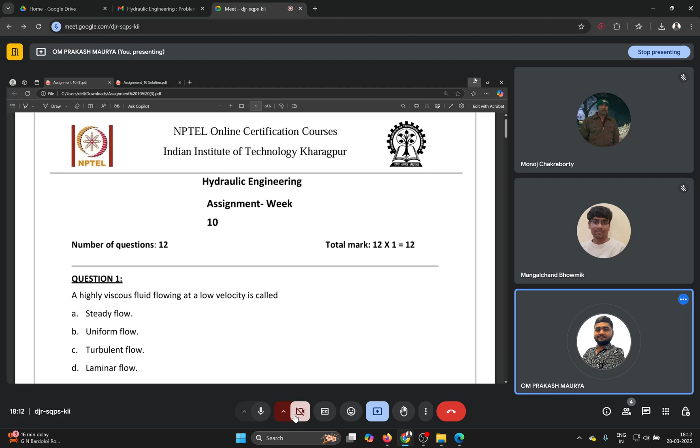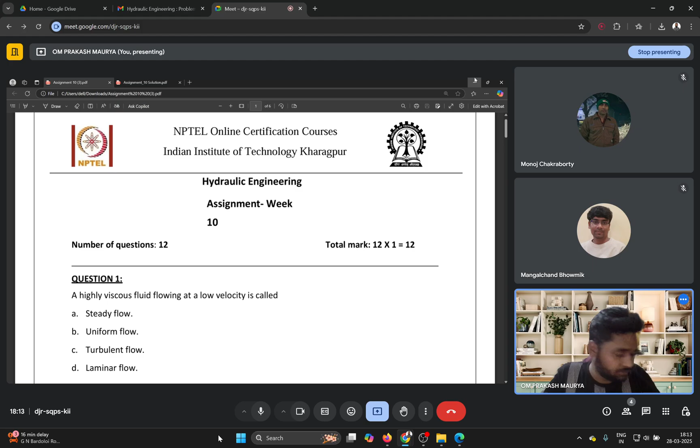Okay, let us start. The first question is: a highly viscous fluid flowing at a low velocity is called steady flow, uniform flow, turbulent flow, or laminar flow. So please try to write your answer in the chat box. Okay, Monoj is telling D option for question number 1, and Mangalchand, you can also write your answer in the chat box.

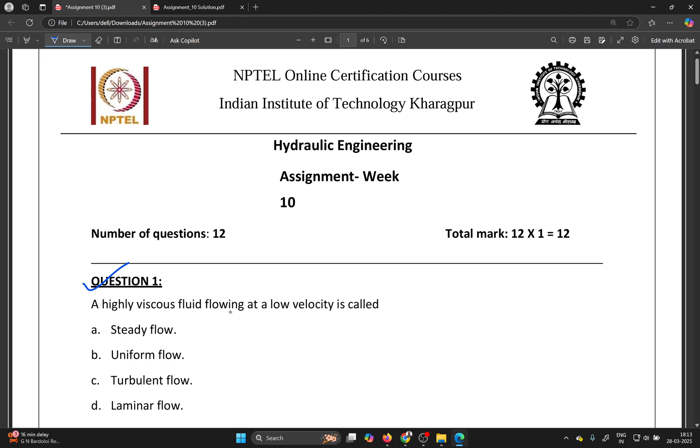Okay, Amit has also joined. So please try to write your answer in the chat box. Question 1: a highly viscous fluid flowing at a low velocity is called a steady flow, uniform flow, turbulent flow, or laminar flow. Which option will be correct? Monoj is telling D. Okay, laminar flow. Amit and Mangalchand, you can also write your answer in the chat box.

Okay, Amit is also telling D. Highly viscous means here the viscosity is more. As you know already, the Reynolds number is rho v d by mu. This is related to your viscosity, right? And if viscosity is more, definitely your Reynolds number will be low. Low Reynolds number means your flow is laminar.

This is a qualitative exam question here, not quantitative, how much Reynolds number, but just for qualitative understanding: if your viscosity is more, then your flow will shift towards laminar. Now we'll move on to the next question.

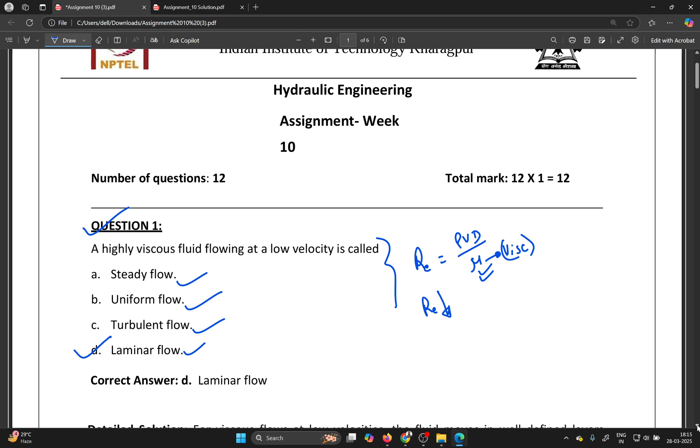Next question: vorticity is thrice the rotation, twice the rotation, 1 to 1.5 times the rotation, or none of the above. Which option will be correct for question number 2? Please try to write your answer in the chat box. Okay, Amit is telling C option, that is 1 to 1.5 times the rotation. Other students, please also try to write your answer for question number 2. Vorticity. Okay, Monoj is telling C, 1 to 1.5.

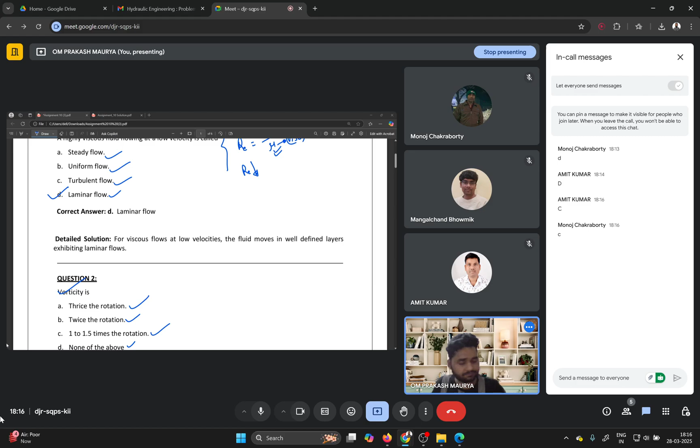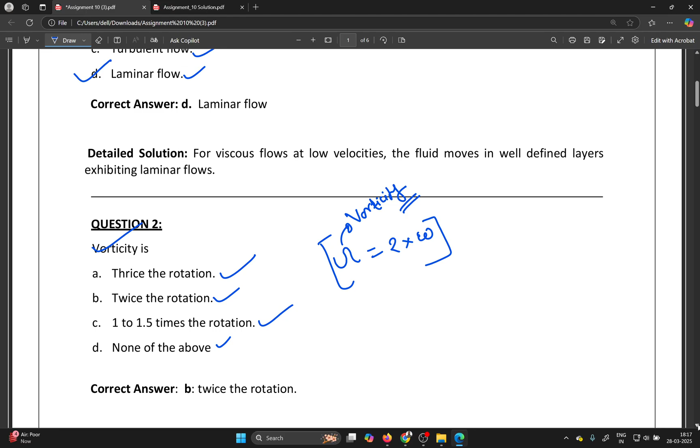So please remember, your vorticity is 2 times the rotation. Always remember your vorticity is 2 times the rotation omega. Always remember this is the vorticity symbol. Here you can see the detailed solution. The vorticity field is the curl of the velocity field and is twice the rotation rate of the fluid particle.

Next question: when a stream function exists, it means the flow is steady and incompressible, the flow is uniform, the flow is turbulent, or the function represents a possible flow field. Which option will be correct for question number 3? Please think on the question, then try to write your answer in the chat box.

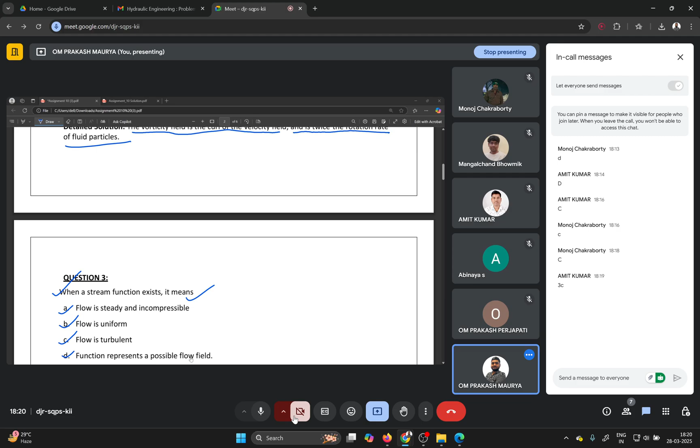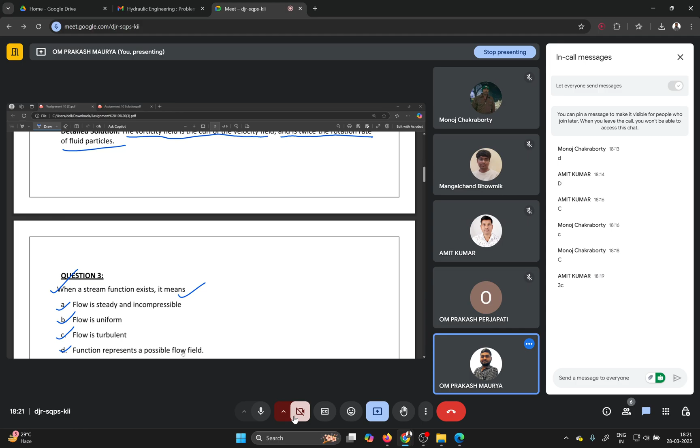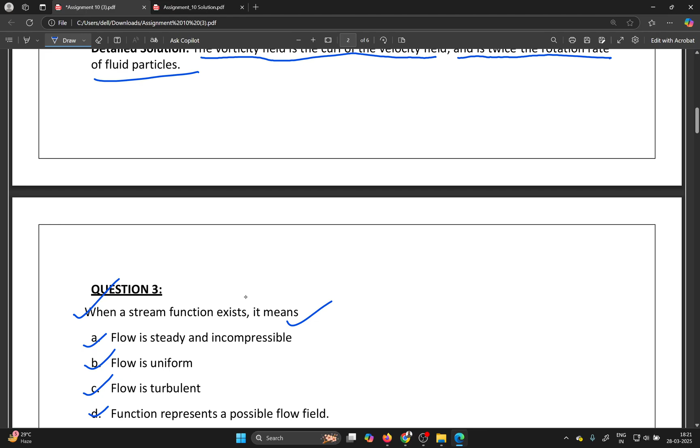Okay, Amit is telling option C, the flow is turbulent. Monoj is also telling C. Okay, other students, please also try to write your answer. So here the question is, stream function exists means the function represents the possible flow field.

Let us assume the stream function exists. If water is flowing like that, what does stream function mean? You know already the two functions, the potential line and the streamline, right? So let us suppose water is flowing and the stream function of that flow exists; it means that mathematical function represents the possible flow field.

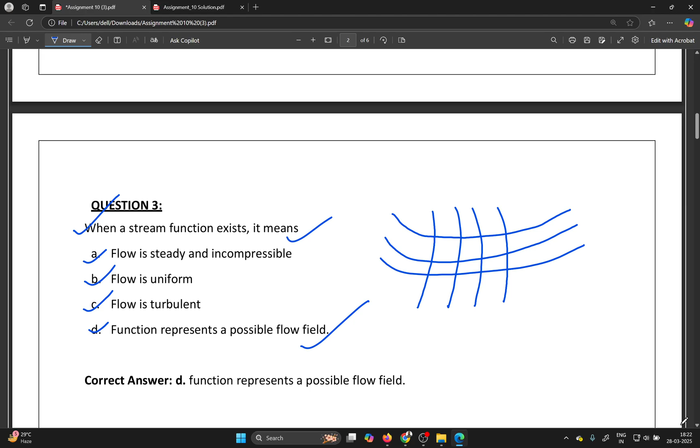So remember, the next point here is also given: if a stream function exists, the flow may be rotational or irrotational, a possible flow field. If it satisfies the Laplace equation, it is a case of irrotational flow. Let us suppose a stream function is given, right? It may be rotational or it may be irrotational. But if that function satisfies the Laplace equation, the flow is irrotational. This is the condition.

Next question. If a stream function exists for a flow and satisfies the Laplace equation, then the flow is rotational and satisfies the continuity equation, irrotational and satisfies the continuity equation, irrotational and does not satisfy the continuity equation, or none of the above. Please think on that. I have just discussed the Laplace equation and stream functions, so based on that, please write your answer in the chat box for question number 4.

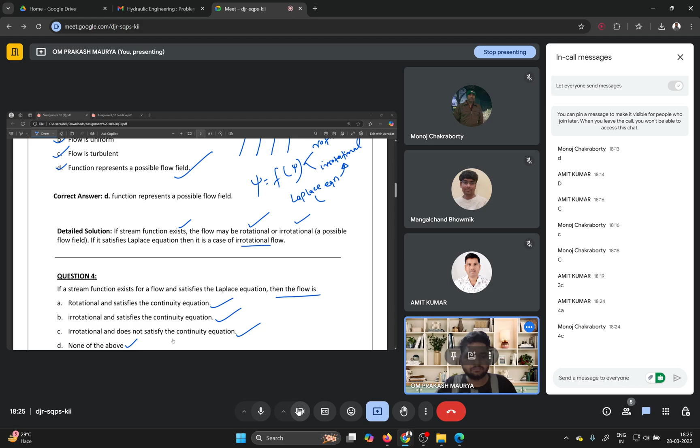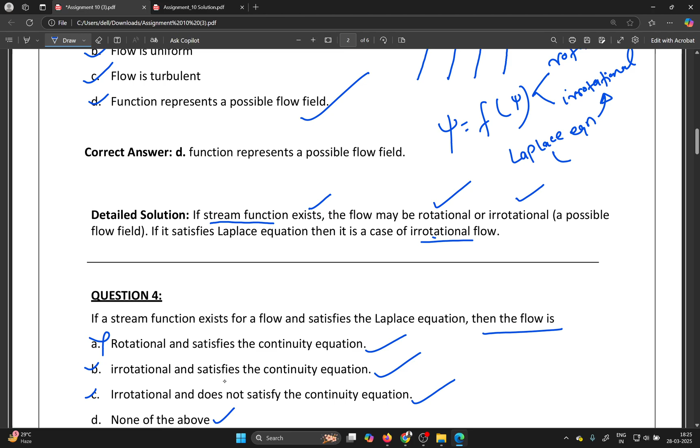So 4A means here, as I have just discussed, if a stream function satisfies the Laplace equation, then it is irrotational. So maybe B or C will be correct. A will not be correct because the question says it satisfies the Laplace equation also. So definitely it should satisfy your continuity equation as well as the irrotational condition. So option B will be correct for question number 4.

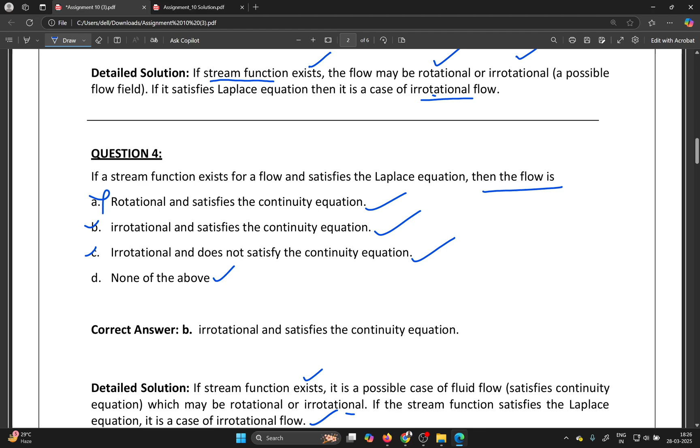Here you can see the detailed solution. If a stream function exists, it is a possible case of fluid flow satisfying the continuity equation, which may be rotational or irrotational. If the stream function satisfies the Laplace equation, it is a case of irrotational flow. Remember please. Next question.

Question number 5. When the velocity potential exists in a flow, it means the flow satisfies the condition of rotational flow, vorticity is non-zero, flow satisfies the condition of irrotational flow, or all of the above. When the velocity potential function exists, remember please, the question here is not about the stream function, it's about the velocity potential function. So please try to write your answer for question number 5.

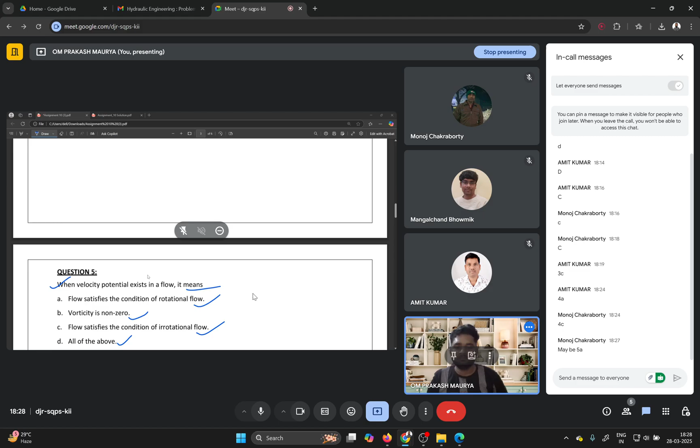Okay, let me just show you the answer. So here, when the velocity potential function exists in the flow, it means the flow satisfies the condition of irrotational flow. Remember please, the flow satisfies the condition of irrotational flow. Remember always. The existence of the velocity potential function guarantees irrotational flow.

But here you can compare two things, the stream function as well as the potential function. If your stream function exists, it may be rotational, it may be irrotational. But if the velocity potential function exists, it guarantees the flow is irrotational only.

But let us suppose you have only the data for calculating the stream function. You can do only the calculation for the stream function. So when you need to determine whether it is rotational or irrotational, what you will do is calculate the Laplacian. You will check whether it satisfies the Laplace equation or not. If it satisfies the Laplace equation, the flow is irrotational.

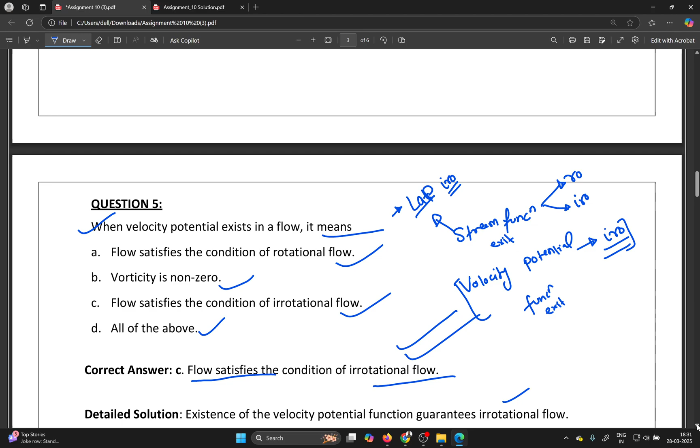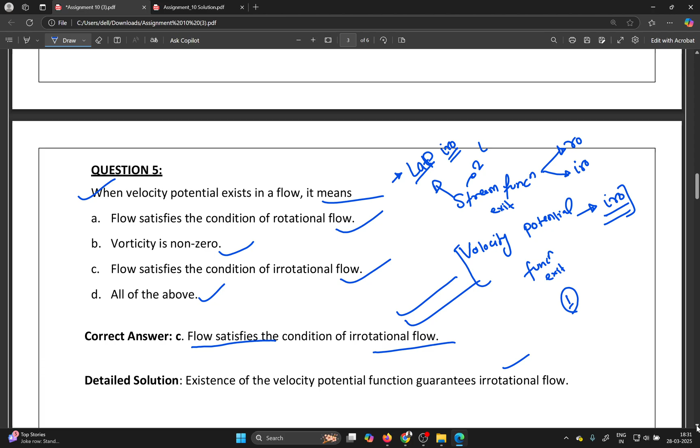So for a stream function, you have a two-step calculation. First, whether the stream function exists or not, and second, the Laplace equation for rotational or irrotational. But for the velocity potential function, you have only a one-step calculation. If it is satisfied, irrotational; not satisfied, rotational. So this is the benefit of your velocity potential function. Now we'll move on to the next question, question number 6.

The deletion of the viscous term from the Navier-Stokes equation leads to: meaning if you delete the viscous term from your Navier-Stokes equation, the remaining equation is known as Bernoulli's, Euler, Torricelli, or Darcy's. Which one? Please try to write your answer in the chat box for question number 6.

Okay, Monoj is telling B. Okay, Monoj is telling B. Okay. Other students, please also try to write your answer. Okay.

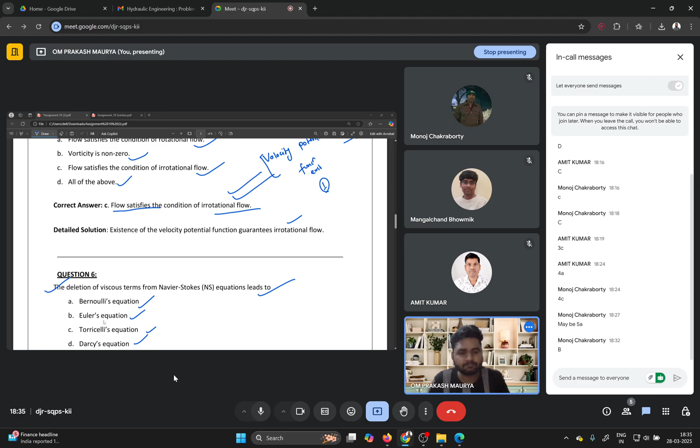So here, let us assume the Navier-Stokes equation. From the Navier-Stokes equation, you are going to delete the viscous term, that is, the force due to viscosity, right? After removing the force due to viscosity, your remaining equation will be Euler. Remember, please, the Euler equation. The remaining equation will be Euler.

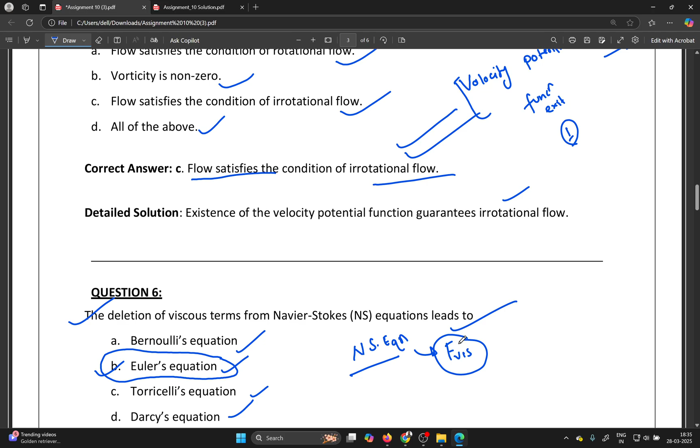Question number 7. In fluid mechanics, the continuity equation is a mathematical statement embodying the principle of conservation of momentum, conservation of mass, conservation of energy, or none of the above. Which option will be correct for question number 7? Please try to write your answer in the chat box for question number 7.

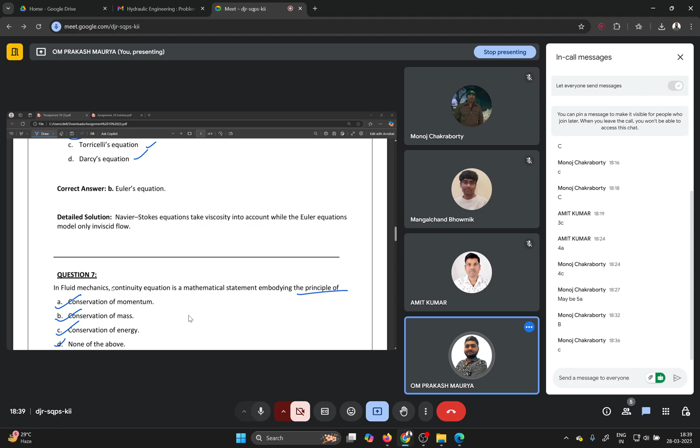Okay. So your continuity equation basically is the conservation of mass. Remember please, continuity equation is conservation of mass, and Bernoulli's concept is based on conservation of energy. Always remember. But let us discuss these two terms, that is your Navier-Stokes equation and Euler equation.

So let me write in the x direction your momentum equation, which is derived by Euler. Momentum in x direction. Let us assume x in this direction and y. We are assuming here 2D. So steady, what is happening? Okay. So here x in 2D. So remember please, we are considering here steady and incompressible flow.

Incompressible flow. So here you have u del u by del x plus v del u by del y is equal to minus 1 by rho del p by del x. This is your Euler. Now Navier-Stokes equation. Let me just write. Then you can interpret it in x direction.

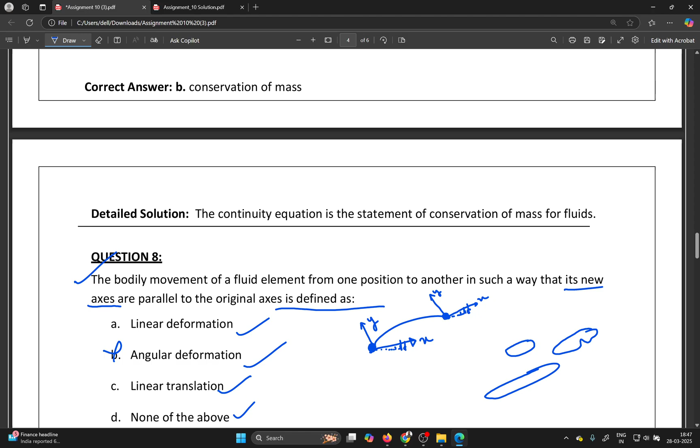So angular deformation will be wrong. Linear deformation or linear translation, these two options remain. So whether you go with deformation or translation. Deformation means your fluid element will be deformed like that. Translation means if the shape is similar here, your fluid particle translates from one position to another position. So now please think again and try to write your answer in the chat box.

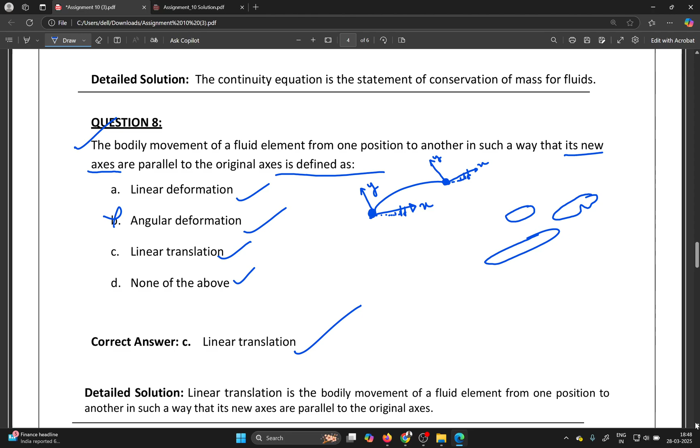Everyone please write your answer in the chat box. Okay, let me just show you the answer. So here it is linear translation. Linear translation, remember please. Linear translation is the bodily movement of a fluid element from one position to another in such a way that its new axes are parallel to the original axes. Remember please.

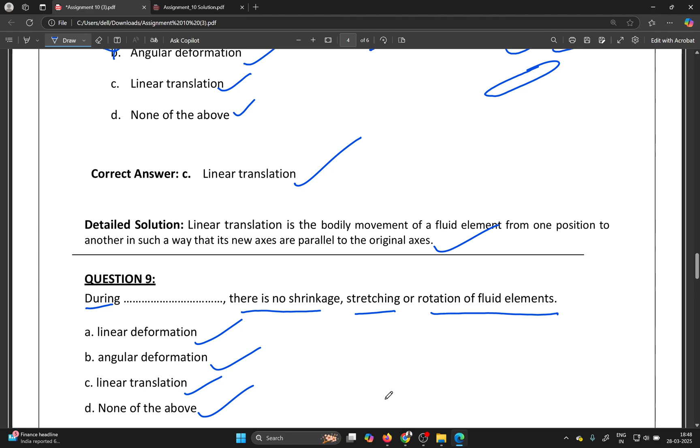Question number 9. During blank, there is no shrinkage, stretching or rotation of the fluid element. Linear deformation, angular deformation, linear translation, none of the above. Which option will be correct? Based on the previous explanation, try to write your answer in the chat box. Everyone, please try to write your answer in the chat box.

Okay, it should be C. Okay, for question number 9 you are telling C. Okay, other students, please also try to write your answer.

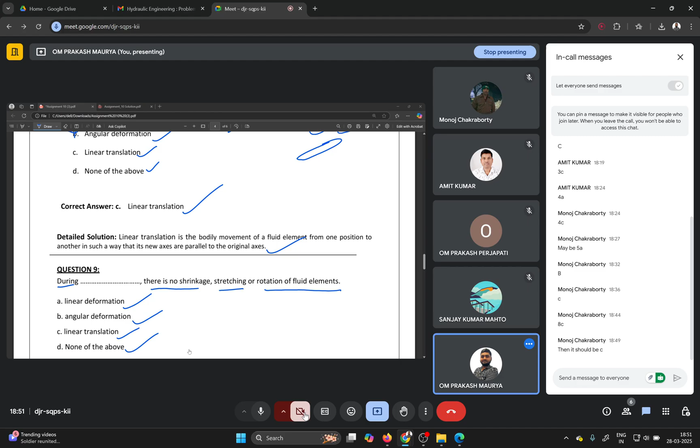Okay, let me just discuss. So yes, definitely option C is correct, linear translation, because, whatever we have discussed, there is no shrinkage, stretching or rotation of the fluid element. So definitely linear translation will be correct. Option C will be correct.

Next question is, what are the independent variables in the Navier-Stokes equation? XYZ rho, XYZ mu, XYZ rho t, XYZ t. Independent variables we are talking about here. Try to write your answer in the chat box, please. Everyone, please try to write your answer.

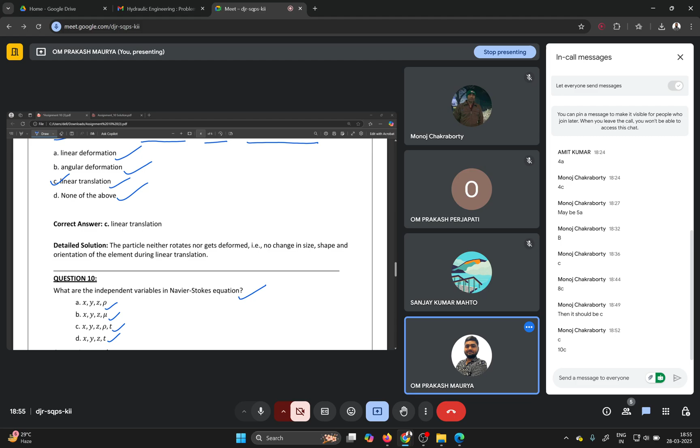Okay, let me just show you. Yes, option D will be correct here. We are talking here about the independent variables x, y, z. Independent means what? Let us suppose variables are of two types, independent and dependent, in a very simplified way. Let us suppose you have y is equal to f of x.

So here you are independent to put the value of x. Maybe you can put 1, maybe 2, maybe 3, whatever you want. Based on the x value, your y is dependent. So here y will be the dependent variable. So the question is asking about the independent only.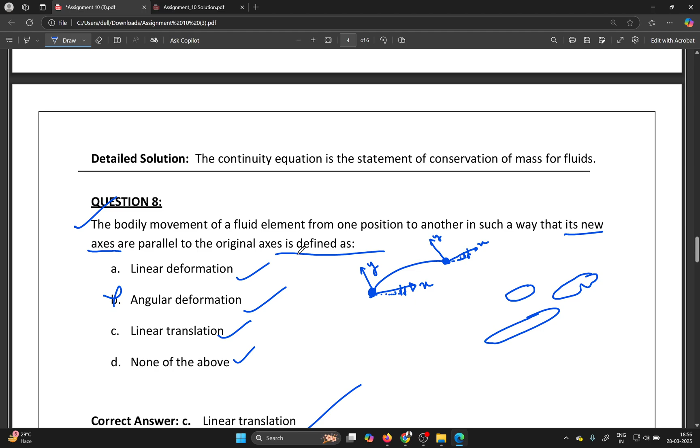So you are free to put x, meaning you are free to identify the fluid properties at any particular location x, y, z in the Navier-Stokes equation, whatever I have discussed earlier. Remember, please. So the independent variables are x, y, z and t.

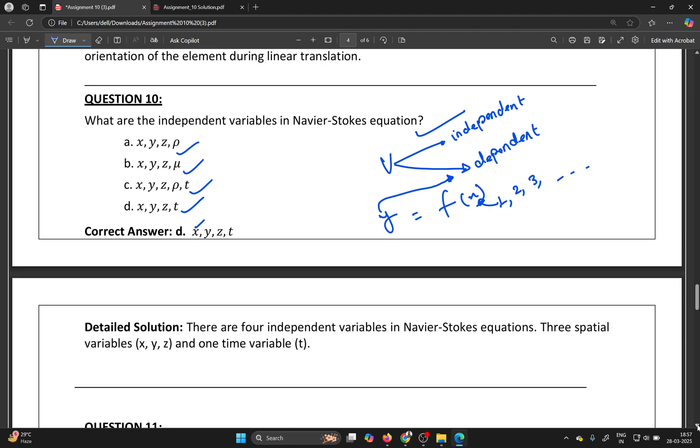Now I'll move on to question number 11. Navier-Stokes equations are a coupled, uncoupled, exponential or radical system of equations. Just please try to think and write your answer in the chat box, whether it is coupled, uncoupled, exponential or radical. For question number 11, please everyone try to write your answer.

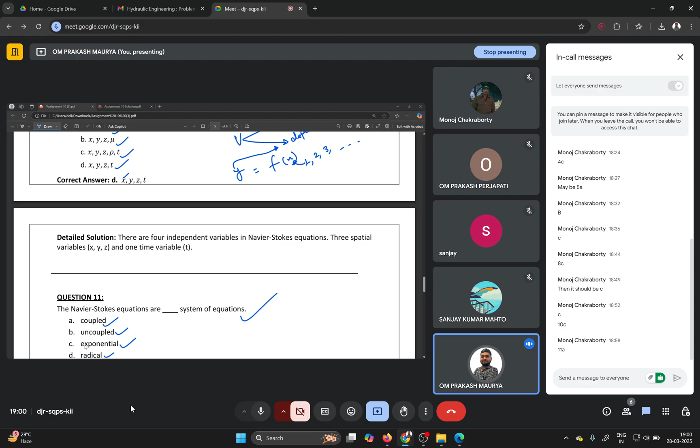Okay. So your Navier-Stokes equation is a coupled system. Remember always, please. The Navier-Stokes equations are called a coupled system of equations because all of the equations should be solved to get the dependent variables.

All of the equations means the x direction, y direction, z direction and continuity equation, and the equations cannot be solved separately to get the unknowns. If you are going to calculate the unknown values, you need the combination of the equations, that means coupled, and the vice versa is uncoupled.

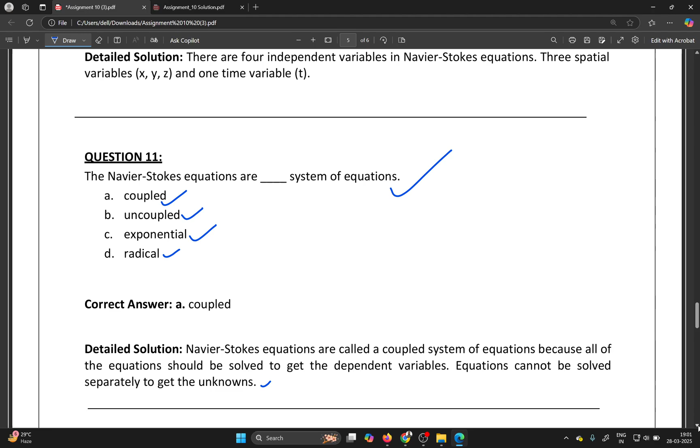So the next question, question number 12, an important question. The Navier-Stokes equations are all partial differential equations. What will be the best reason behind it? Why partial differential? Ordinary differential equations are not present in the Navier-Stokes equation.

The dependent variables are functions of all independent variables. Each dependent variable depends on only one of the independent variables. And partial differentials are only present in the Navier-Stokes equation. So please try to write your answer in the chat box. Everyone, please, for question number 12.

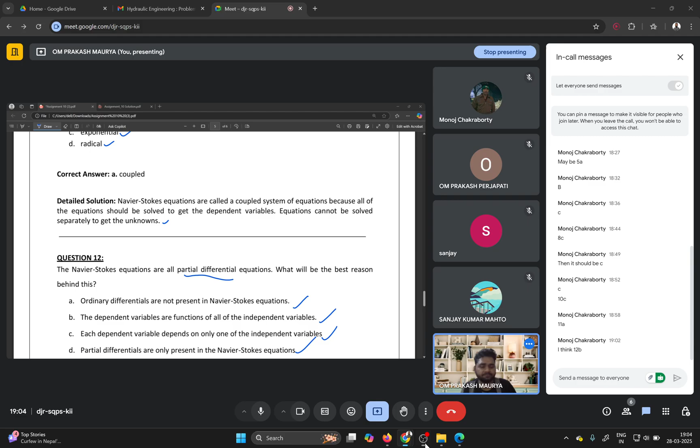Okay, other students, if you want to write your answer, you can write. Otherwise, I'll just show you. Okay, let me just show you. So option B will be correct. Yes, you are correct. The dependent variables are functions of all independent variables. Each dependent variable in the Navier-Stokes equation depends on all of the independent variables. So partial differentials are used to indicate that the other independent variables should be kept fixed while differentiating. Just the differentiating rule of the partial differential equation is written here.

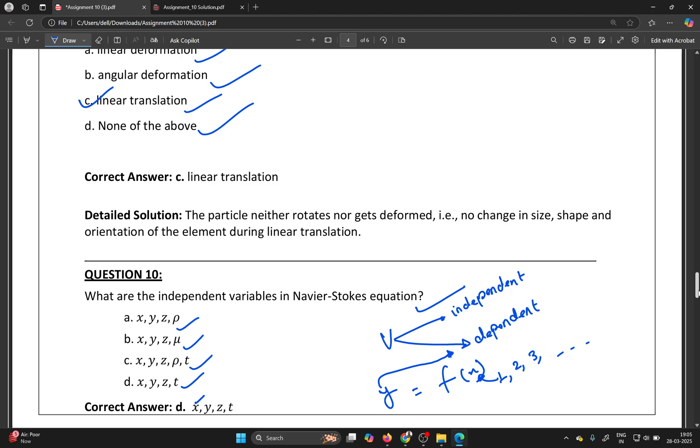But the reason behind it: all dependent variables, meaning y is equal to f of x, what I was telling, y is the dependent, remember please. So all dependent variables are functions of the independent variables, that is x, y, z, t. Remember please. So this is about your question from the assignment of hydraulic engineering 2024, previous year. Now we'll move on to the next one, this 2023.

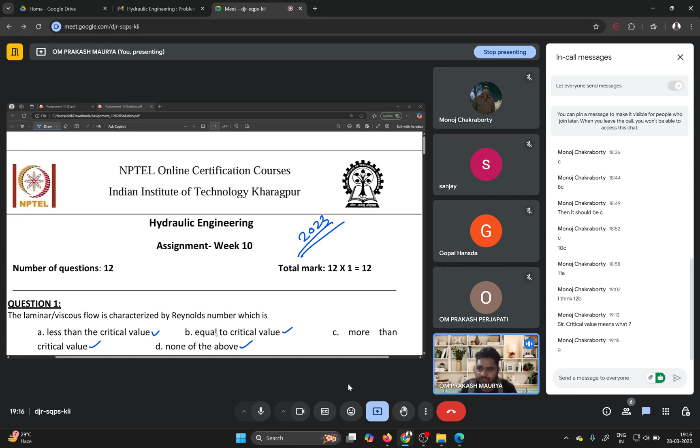So like that, here is also a critical value. After that, flow characteristics will be changed, maybe laminar to turbulent or turbulent to laminar. So that value is the critical value. So just think on that and try to write your answer. Anyone please try to write your answer. Okay, Monoj is telling A option, less than critical value. Other students, anyone want to comment? Anyone please write your answer for question number 1. Okay, so yes, A will be correct here.

Remember please, as you all know, for pipe flow, let us assume Reynolds number less than or equal to 2000, somewhere 2100, somewhere you will find 2300. So we'll consider 2000. If the value is less than or equal to 2000, this is laminar. So the critical value for pipe flow is 2000. If your Reynolds number is, let us suppose, 2500, your flow is turbulent.

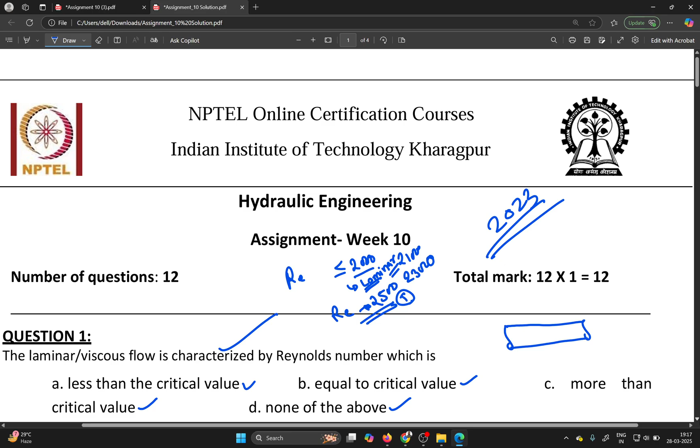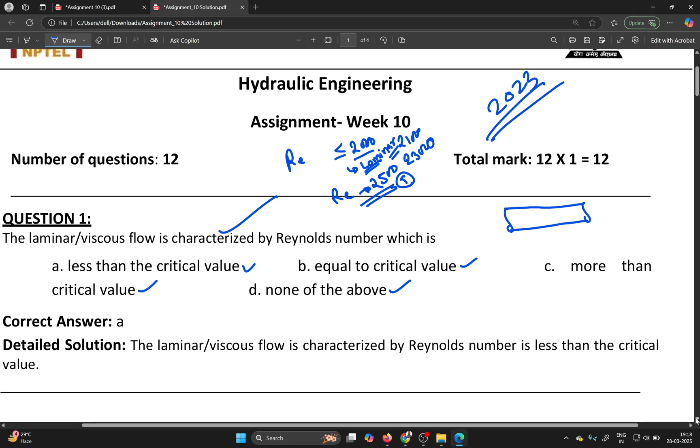Okay, less than the critical value is correct, because we are talking about laminar flow characterized by less than the critical value. So the laminar or viscous flow is characterized by less than the critical value. Good. The next question is the ratio of maximum velocity to average velocity for viscous fluid flow between two parallel plates: A 1, B 2, C 1.5, D 2.5. So please everyone try to write your answer in the chat box for question number 2.

Okay, got it. So B, you are telling 2. Other students please also try to write your answer. Here the question is about two parallel plates, the maximum velocity to average velocity. Monoj is telling B, that is 2. So here I'll discuss a little bit about your parallel plate as well as your pipe, how the ratio of maximum to average velocity changes, the difference between parallel plate flow and pipe flow. Okay, let me discuss here.

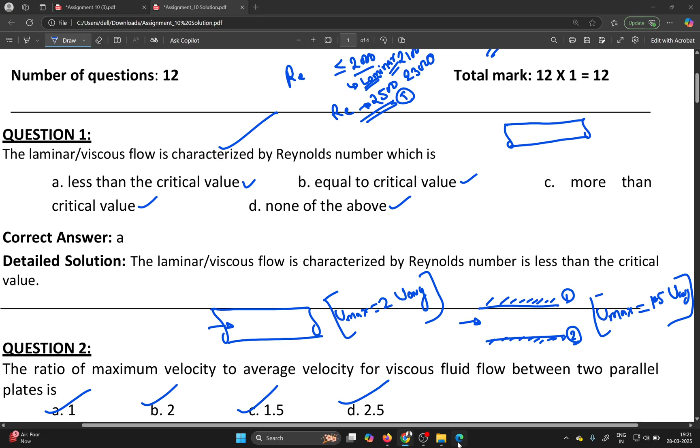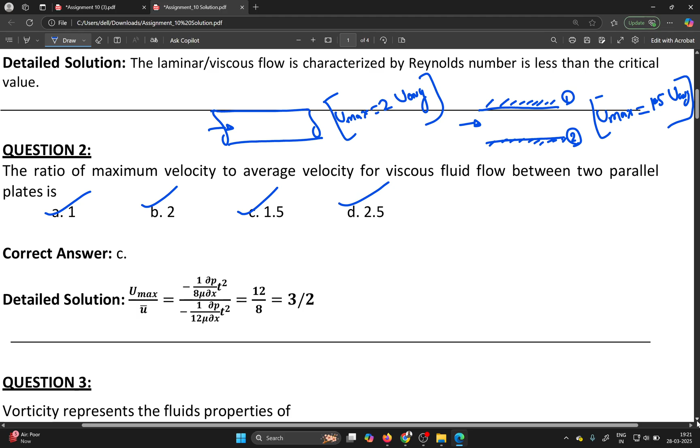So this is the fundamental difference in magnitude. Okay. So now we'll move on to the next question. Next question is question number 3. The vorticity represents which property of the fluid: kinematic, transport, thermodynamic, or other miscellaneous? Which option will be correct?

Vorticity. If you want to put vorticity in a category, is it a kinematic property, transport, thermodynamic, or other miscellaneous, that is, none of these three: kinematic, transport and thermodynamic? The vorticity. Please try to write your answer, everyone, for question number 3.

Okay, Gopal is saying option A, kinematic. Other students, please try to write your answer. Very simple one. Just think about in which topic you have studied this vorticity. From that you can guess.

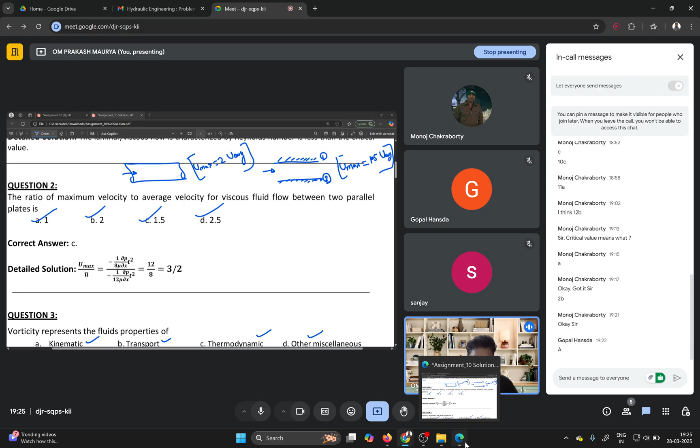Okay, definitely Gopal is correct. So actually the vorticity is a kinematic property. Next, we'll move on to the next question. Here you can just see the kinematic properties: linear velocity, angular velocity, vorticity, acceleration, and strain rate.

Transport properties: viscosity, thermal conductivity, and mass diffusivity. Thermodynamic properties: pressure, density, temperature, entropy, and enthalpy.

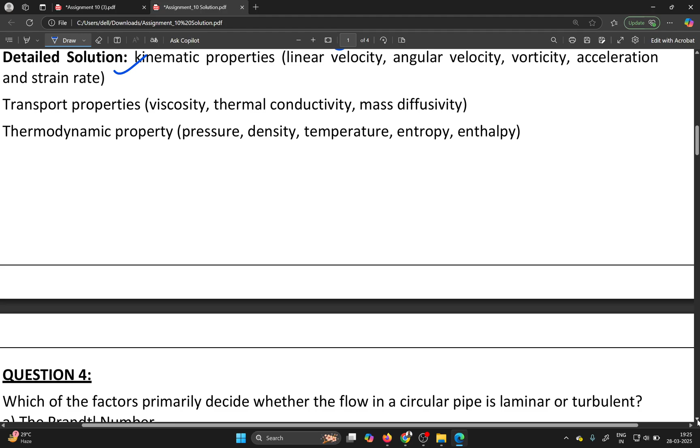The next question is question number 4. Which factor primarily decides whether the flow in a circular pipe is laminar or turbulent? Prandtl number, pressure gradient along the length of the pipe, dynamic viscosity coefficient, or Reynolds number. Which option will be correct, please? Very simple question. So everyone please try to write your answer for question number 4.

Monoj, you are asking about the vorticity. If you know the rotation, when you multiply the rotation value by 2, you will get the vorticity. Vorticity is just 2 times the rotation.

Everyone please try to write your answer for question number 4. Very easy question. So just read the question very carefully and try to write your answer. Okay. Gopal is saying B. Monoj is also saying B. Okay. Other students, please.

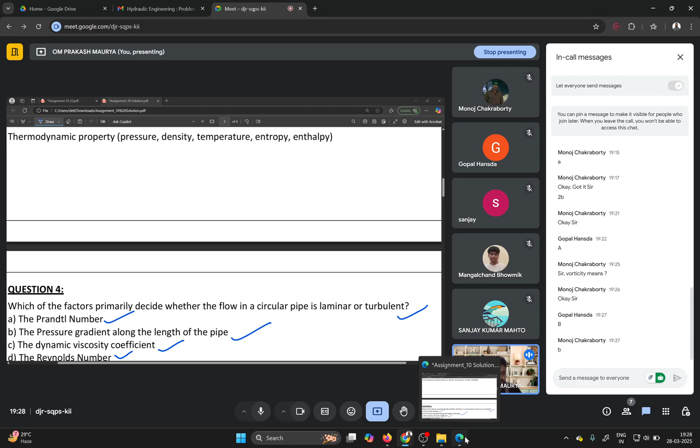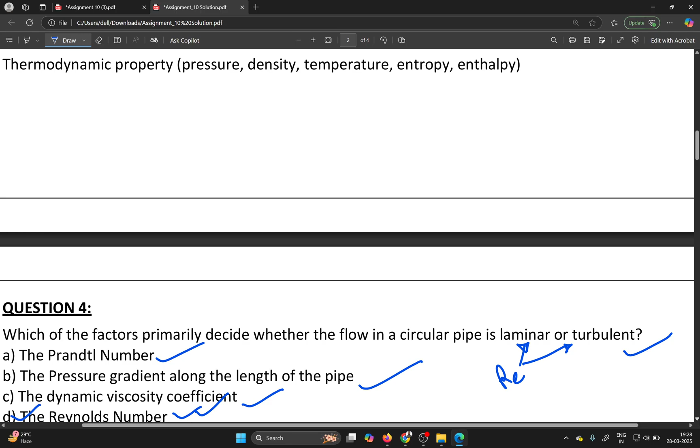Okay, this was a very basic question, so I was expecting the correct answer from all participants. You all know how we decide whether flow is laminar or turbulent: Reynolds number. Very simple. D option will be correct for this.

As you all know, high Reynolds number flows, greater than 4000, are turbulent. We are talking here about pipe flow, circular pipe, remember. Whereas low Reynolds number flows, less than 2100, are laminar, and the viscosity coefficient is a part of the Reynolds number but isn't the only criterion for the decision.

Question number 5. The Navier-Stokes equation is derived from: Euler equation, continuity equation, first law of thermodynamics, or Newton's second law. Which option will be correct? Very important question. So everyone please try to write your answer. Just think about it.

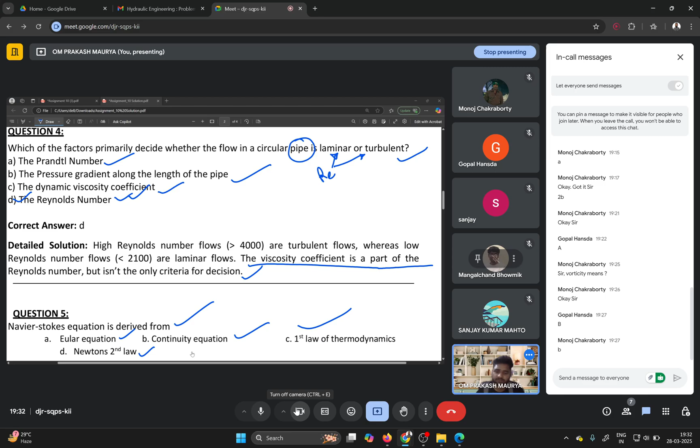Okay. So you all know, for the derivation of any momentum equation in fluid mechanics, whether you derive the Euler equation or the Navier-Stokes equation, it is based only on Newton's second law. Always remember, please. So now we'll move on to the next question.

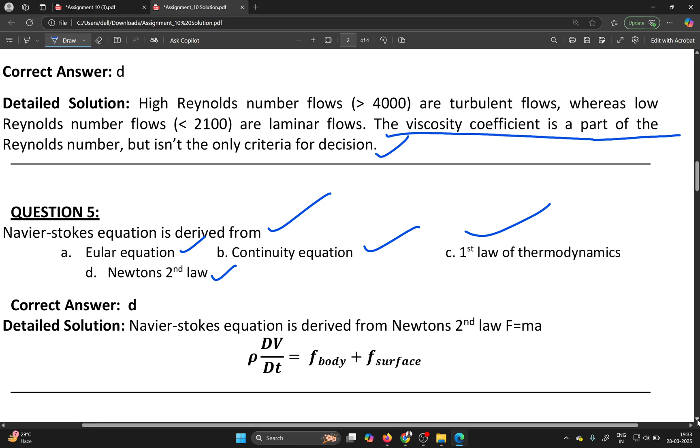Question number 6. The stress tensor tau ij is a symmetric, asymmetric, isometric, or none of these tensor. So please everyone try to write your answer. A little bit advanced, but not much. You have 2 minutes for this question. Please within 2 minutes try to give the answer.

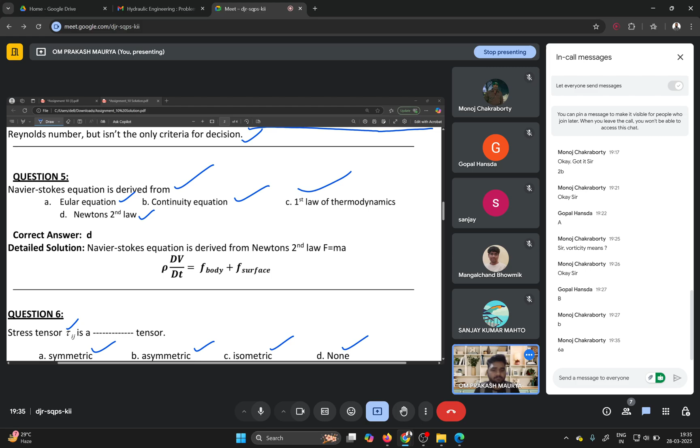Six A, symmetric. Okay. Other students, please also try to write your answer. Okay, definitely it will be the symmetry. Okay, the next question. Okay, here the answer is visible.

So which of the following flows have the highest critical Reynolds number? Flow in pipe, flow between parallel plates, flow in open channel, flow around a spherical body. Highest critical Reynolds number. So please, I want from your side the value. What should be the value? And here what should be the value? And for this and for this, what should be the value?

Please everyone. The answer is 1, and you know already the answer is A, means the flow in pipe has the highest critical Reynolds number. But how much? For parallel plate how much? For open channel how much? And for your spherical body how much? So we have the discussion. I'll show you. Just please first you try to write your answer here. Everyone please try.

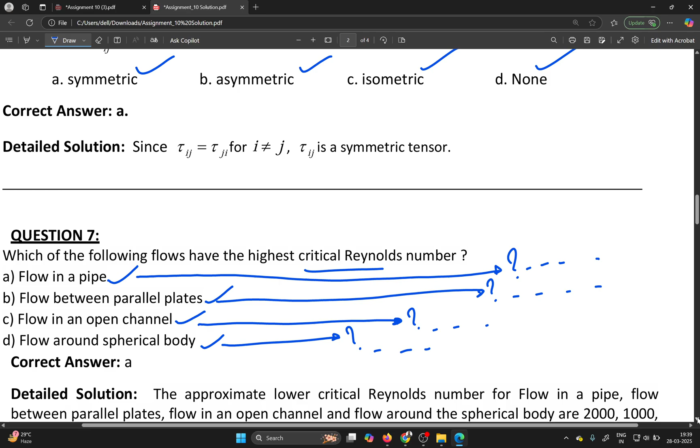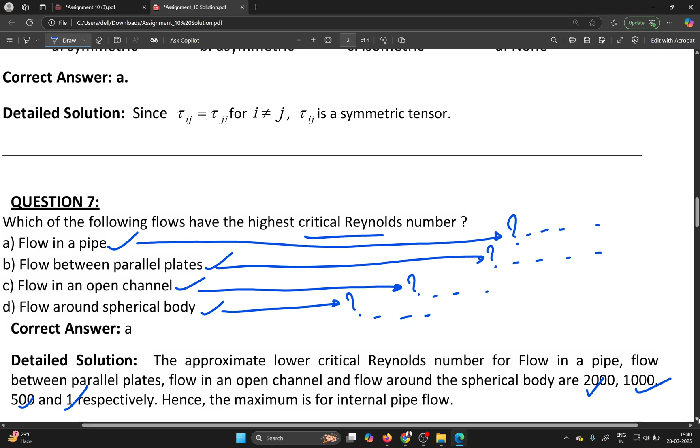So the answer is, for pipe flow 2000, flow between parallel plates you have 1000, flow in open channel 500, and flow around a spherical body is 1. So you can see. The next question is question number 8. Okay.

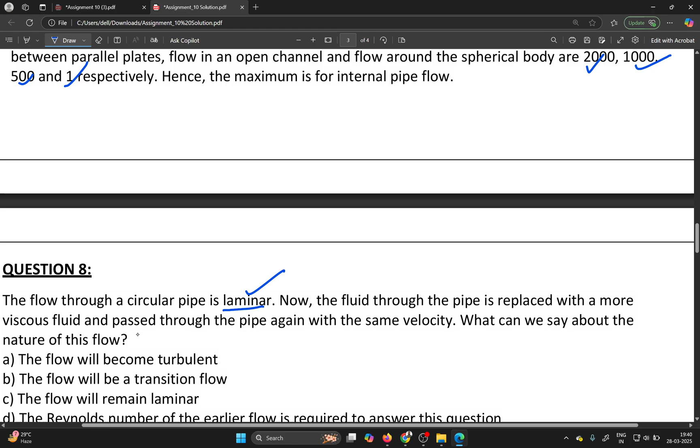The flow through a circular pipe is laminar. Here in the question it is written the flow is laminar. Now the fluid through the pipe is replaced with a more viscous fluid and passed through the pipe again with the same velocity. What can we say about the nature of flow? It will become turbulent, will become transition, remain laminar, or the Reynolds number of the earlier flow is required to answer this question. So which option will be correct for question number 8?

Based on your understanding of the previous week's class, that is the NPTEL lectures, please think on that. Read the question very carefully and try to write your answer. Please everyone read the question very carefully and try to write. Okay. Monoj is telling C. 8C, the flow will remain laminar. Okay. Other students please also try to write your answer, based on your understanding of previous classes.

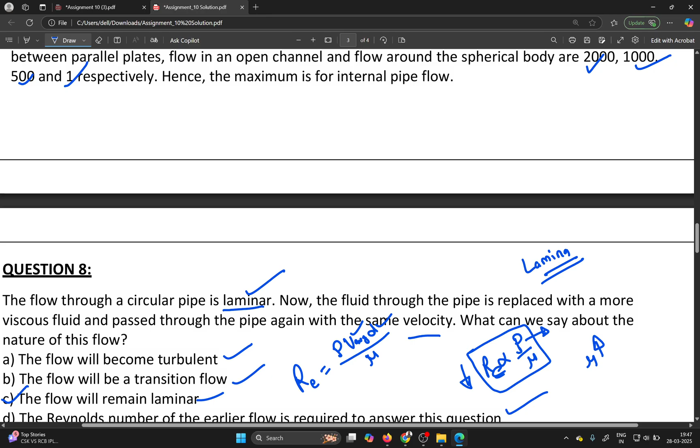After choosing the more viscous fluid, the mu value is increased. If the mu value increases, definitely your Re value will decrease. But it also depends on rho, how much rho value you choose, but the rho value is not given here. But again, if your dynamic viscosity is going to increase, the Reynolds number will decrease. So definitely your flow remains laminar. Okay.

You can see the explanation. A flow through a circular pipe is said to be laminar when the Reynolds number is below 2100. A more viscous fluid would have a higher velocity coefficient, thus reducing the Reynolds number further at the same condition. Hence the Reynolds number will be well below 2100. The flow will be laminar. Here it is not velocity coefficient, I think. The viscous value should be more, the dynamic viscosity coefficient, not velocity. So remember, some typing mistake.

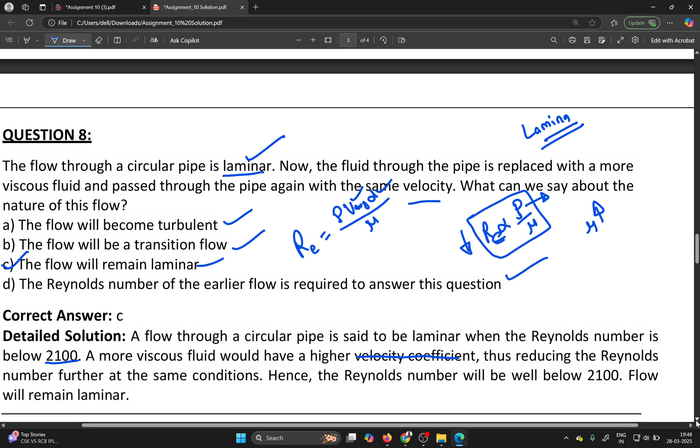Okay, the next question, very easy question. When a problem states the velocity of the water flow in a pipe is 20 meters per second, which of the following velocities is it talking about? RMS, average, absolute velocity, or relative velocity? Question number 9. Everyone please try to write your answer in the chat box for question number 9. Everyone, please.

Okay, 9B, average velocity. Okay. Other participants also please try to write your answer. Other participants, please also try to write your answer in the chat box.

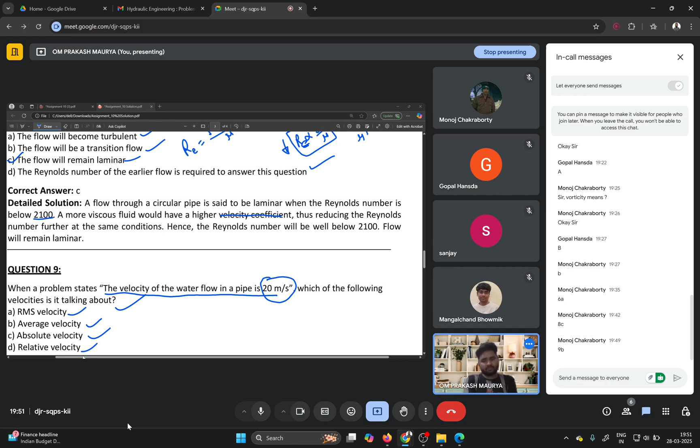Other students, please, anyone want to write? I think these questions we have already solved in the previous classes also. Okay.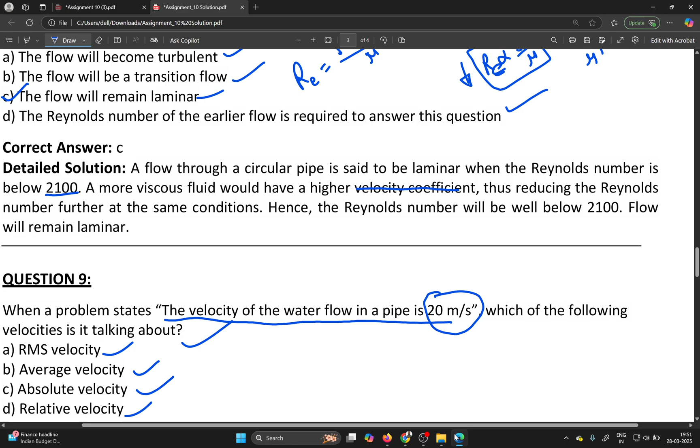So question 9 is about this. Let us suppose in a question just velocity is given, 20 meter per second. It means average velocity is given. Remember always. Option B will be correct definitely. Monoj is correct. Now we'll move on to the next question, question number 10.

Here you can see the explanation. In a pipe flow, the velocity is always referred to be average velocity. There may be a case where all the water particles move in the same direction with 20 meter per second, then the average velocity will be equal to the absolute velocity. But this is only a special case, hence average velocity will always be true. Remember please.

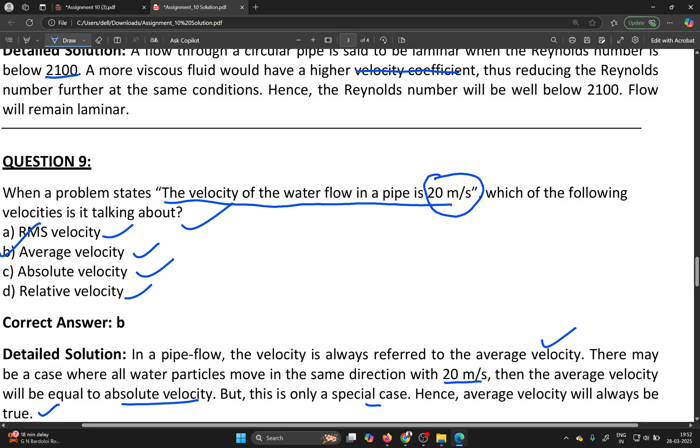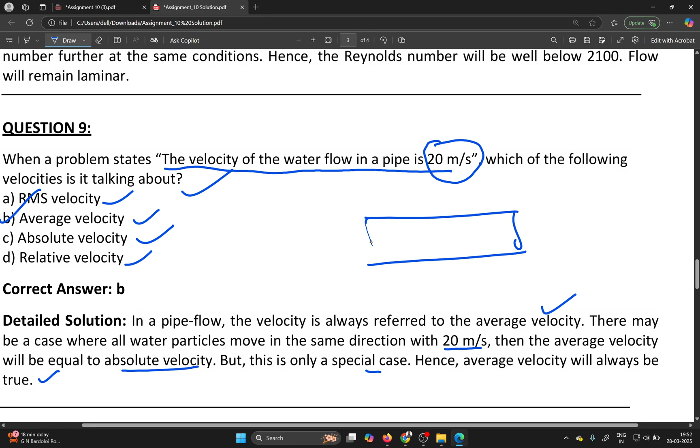Meaning of a special case, what is written here, if I want to show you, let us suppose a pipe flow is given. You know already the velocity diagram is like that for laminar, parabolic, but in a special case, let us suppose this is something different, not a pipe. So your velocity everywhere, that is, the roughness is zero and all.

So all particles moving in the same direction with the same velocity means when you take the average, your absolute value will be the same, but here the average is different and the maximum value will be different. So that is the special case. This case is impossible practically in channel flow or pipe flow, because at the surface velocity will be zero.

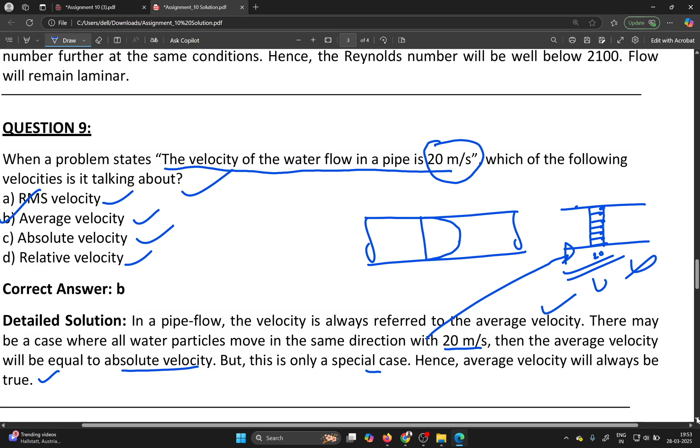Always remember please. In that case your average velocity and absolute velocity will be the same, but this is not possible. So always average velocity, remember. So this was the explanation. Next question is question number 10.

The volume rate of flow Q between two streamlines psi1 and psi2 is equal to: option A, 0; option B, psi1 into psi2; option C, psi2 minus psi1; and option D, psi2 plus psi1. Which option will be correct for question number 10? Everyone please try to write your answer. Very important question.

Okay, maybe 10C, psi2 minus psi1. Other students, please also try to write your answer. Here there's no need to write the correct answer only. You can write whatever you know, whatever understanding you have about the question. There is no issue. So please try to write your answer for question number 10. Okay, Monoj is telling option C, psi2 minus psi1.

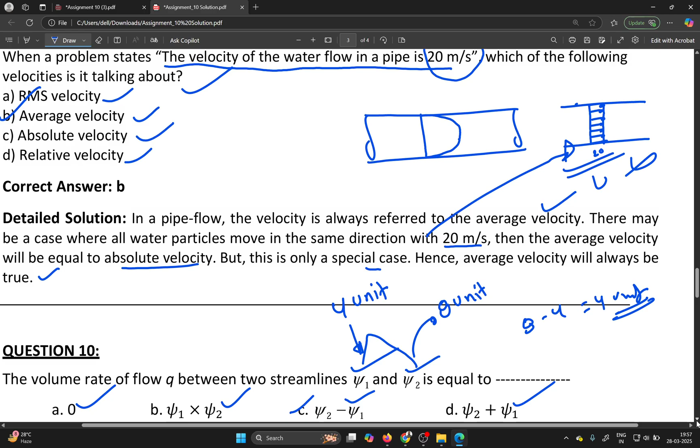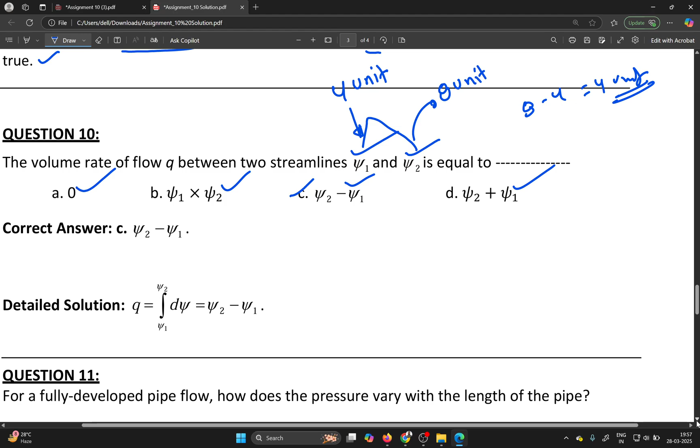Question number 11. For a fully developed pipe flow, how does the pressure vary with the length of pipe? Linear, parabolic, exponential, constant. Read the question very carefully and then try to write your answer in the chat box for question number 11. Everyone please. Very important question.

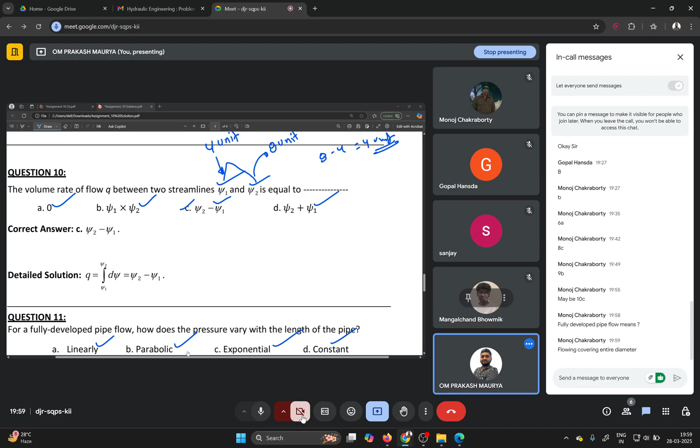Fully developed pipe flow means the flow covering the entire diameter, okay. Oh, your meaning is flow covering it. No, no, that is not the meaning of fully developed. Okay, so let me discuss it in depth, and after the discussion I'll tell you the answer. So fully developed means what? Let us suppose a pipe, as I have discussed many times.

So as your flow enters the pipe, let us suppose flow is entering. Due to the roughness of the pipe and your viscosity, here is the no slip condition. So a boundary layer will be formed here like that, and the boundary layer from this side also will be formed. Very simple. I am going to try to tell you in a very simplistic way.

So here your velocity will vary like that. Also from this side velocity will vary, but in this region your velocity will be constant. Similarly, in this region your velocity will be constant. Here velocity is 0, here a little bit more, a little bit more, but here it is constant throughout. And similarly here also velocity is varying this much and this is constant.

After a few distance, your velocity is varying entirely. That is, here velocity is different, here is different, here is different. That is for laminar. If the flow is laminar, this graph will be parabolic. So remember please, this is your fully developed flow. This is the fully development length of the flow, and fully developed flow means after the flow is fully developed, the velocity diagram will not change.

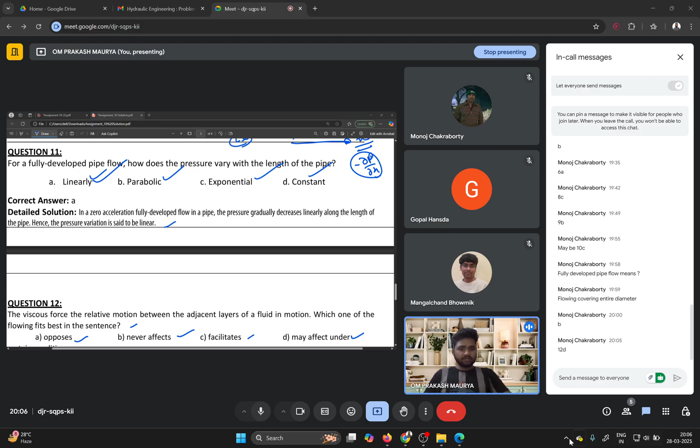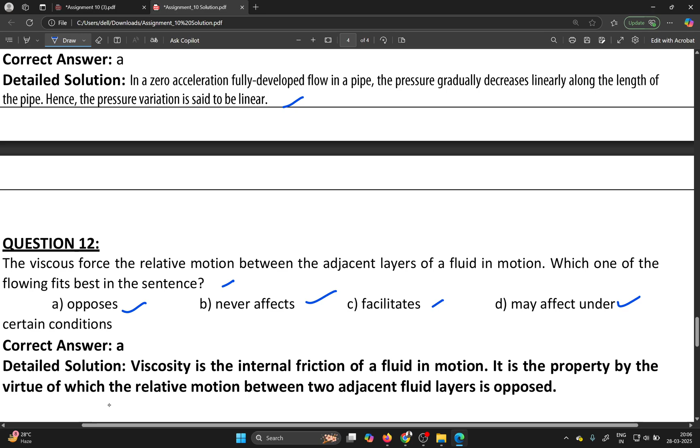So definitely you all know your viscosity creates resistance in the flow, so definitely it will be oppose. Remember please, viscosity is an internal friction of the fluid in motion, and it is the property by virtue of which the relative motion between two adjacent fluid layers is opposed. You know already.